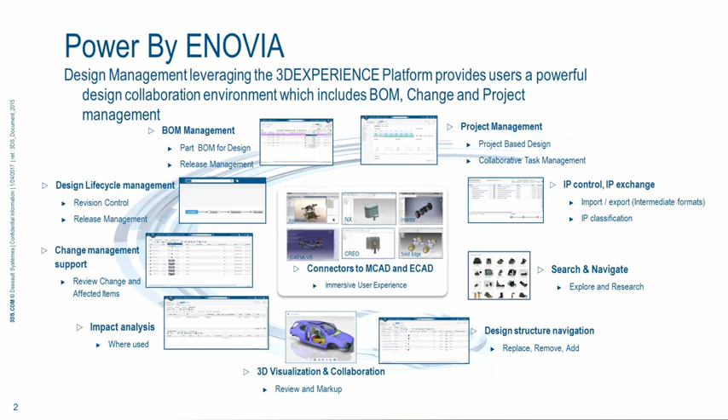So the capabilities we offer with Power By ENOVIA today really look towards the governance applications. We'd also like to include, in the very near future, being able to extend the XCAD data out to applications such as 3DEXPERIENCE, SIMULIA, and DELMIA.

Doing this is something we've always wanted to accomplish. It would provide us with capabilities such as being able to leverage true digital mock-up.

It would also help support multi-CAD structures. So if I have a company using more than one design tool to design their product, they'd be able to see the entire product in its context with multiple design tools, and support the capabilities within the various applications we have out there in 3DEXPERIENCE, Catia, DELMIA, and SIMULIA.

So things like process planning, analytics, and more electrical design, let's say, as a module within Catia—these are all things we could take advantage of if we could get the XCAD data in.

To do that, there are some things we need to do that are different from what we've been doing today. As some of you may know, we have two different underlying models: one being the traditional classic Designer Central model, and one being the model that 3DEXPERIENCE engineering applications sit on.

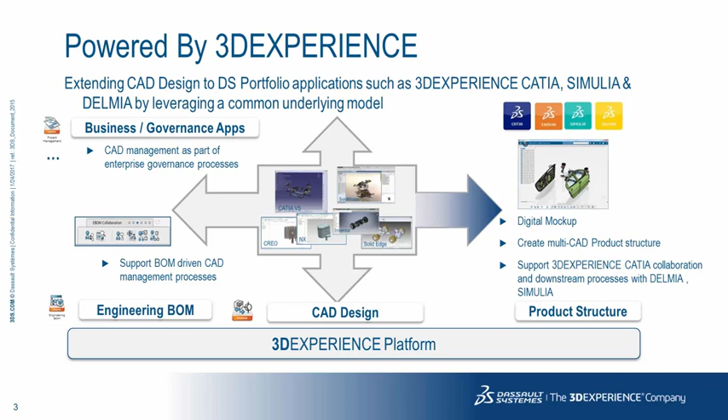What we really want to do is combine those. Now is the perfect opportunity to be able to do that.

If we take a look at the existing ENOVIA XCAD design management solution, we know that it's applet-based. We know it's been around a while and needs a facelift. The applets themselves are no longer supported by new or current browsers.

So that was an opportunity for us to take a look at this design application and ask where we could evolve it to—knowing that our targets need to be not only on-premise, which we support today, but cloud and mobility as we move into the future.

So looking at where we needed to go, we decided we wanted to take advantage of new capability sets, including new user experiences, such as using the 3D dashboarding and widget technology—building up an app out of widgets that helps the designer on the website work with their information without ever opening up their design tool, or collaborate much more easily than before.

So widgets such as folder editors, product structure editors, 3D play, or compare capabilities could all be within a single application that helps the user go through a design session using the web.

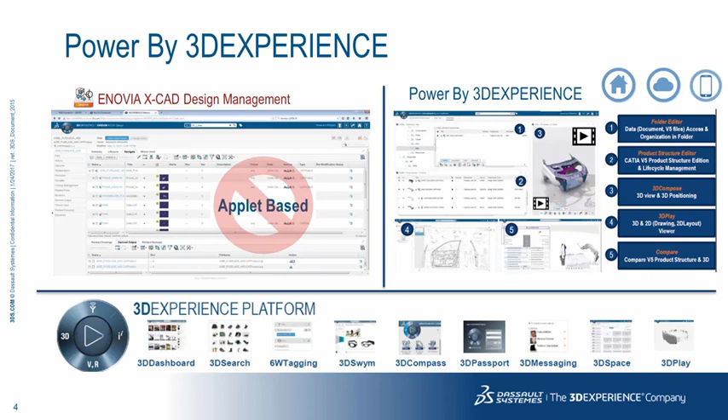So this is where we want to go—having XCAD built on top of the same underlying model as Catia 3DEXPERIENCE and the other DS-rich portfolio applications such as Delmia and SIMULIA.

The values that come along with actually moving onto a common architecture are the following. Being able to do a configured multi-CAD digital mock-up, so increase the design capabilities.

If we can move NX and Creo, for example, into the 3DEXPERIENCE world, we can apply a good deal of capabilities to those designs. Actually have configured design, leveraging the 3DEXPERIENCE Catia, web and mobile access for session building and authoring.

So not just being able to navigate a particular structure, but actually being able to do some DMU, being able to add in components, build a structure, and be able to open up that structure into the design tool.

Integrated change and BOM management, so compliancy with enterprise processes. As I had mentioned previously, we want to continue to extend the XCAD data into the governance applications.

But also start to take some of the governance applications capabilities, such as change actions, and build those right into the design tools themselves. So if the user has a change action they need to take care of, they simply could drag and drop their change action right into the design session and open up that particular design and start to work with it. So having more integral PLM type capabilities right within the design tool itself.

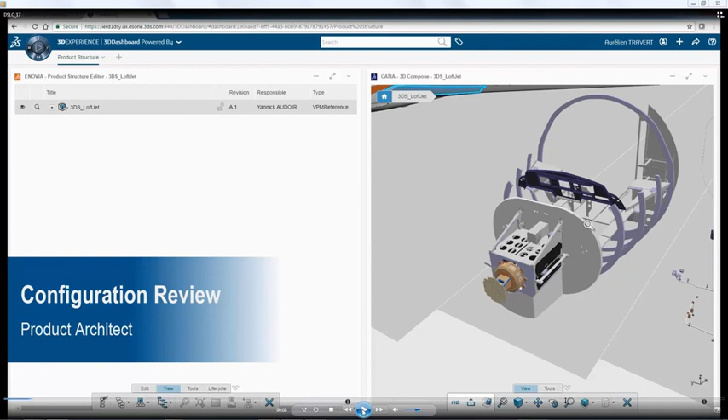So the first thing under a product architect is a configuration review. There's a few different configurations that they may be able to look at. So here they have available product configurations.

Again, we could apply this to the XCAD. They have unit 1, 2, and 3. So the product architect can go ahead and select which product configuration they want and start to be able to look at that and analyze what they want to do.

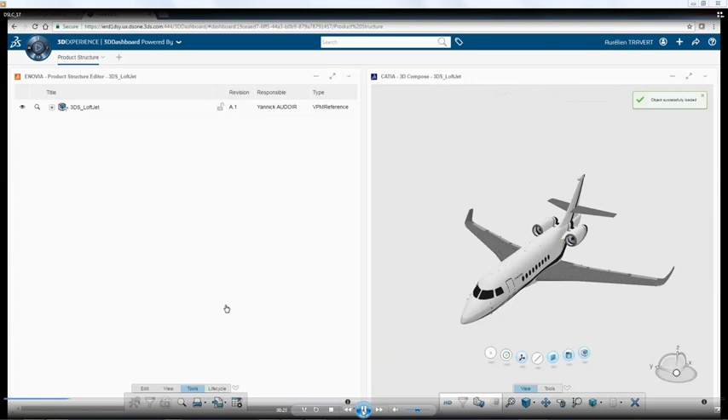In this case, the story is we need to make a change to the radar system. So here we take a close look at what the radar system actually is, where it's located, and then notice the first design tool that we're going to use is the SolidWorks tool.

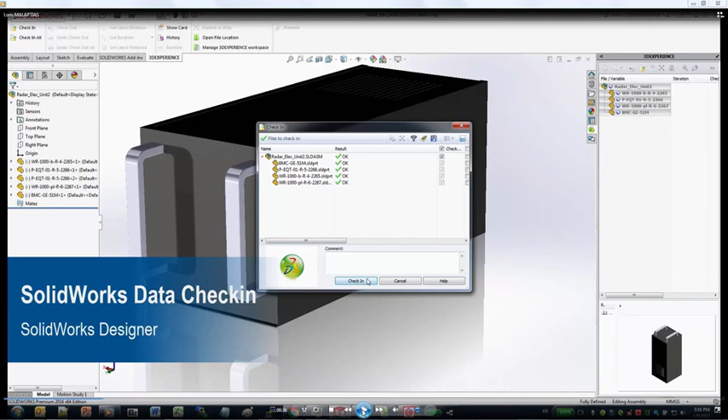This is the electronics box that runs the radar system. So here the SolidWorks data is being checked in from SolidWorks.

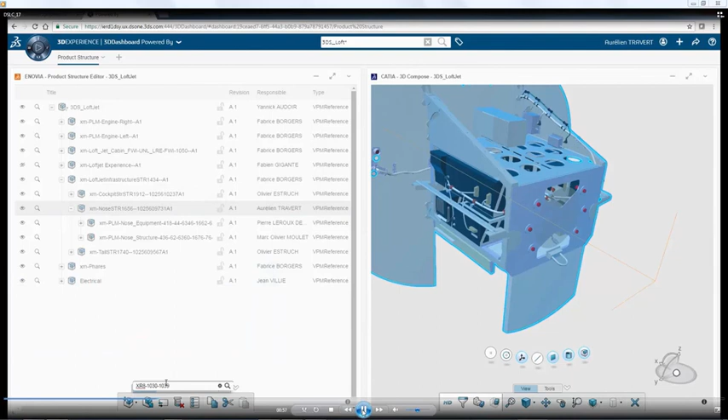So as that occurs, we have the opportunity to do the same thing with Catia for the actual mechanical radar unit itself, and then be able to, within the product architecture, insert those components into this assembly to get an idea of what they would look like.

Again, we're here basically doing a digital mock-up type of scenario. So we go out and we search for each of the respective components, and it doesn't matter where they came from, we're supporting them under the same common architecture. So here we can see that 3 different tools, Catia V5, SolidWorks, and 3DEXPERIENCE Catia, are being used in this scenario.

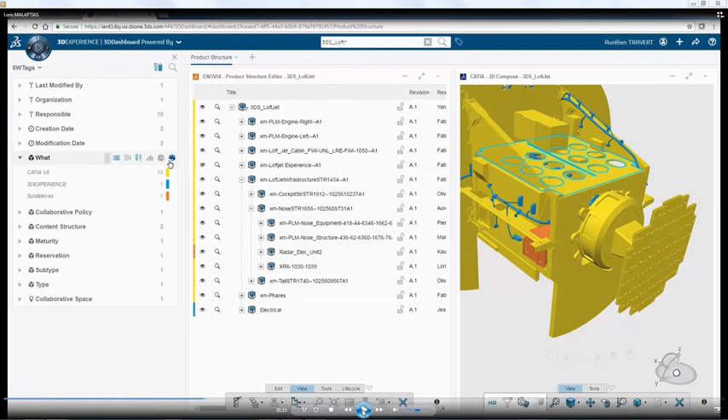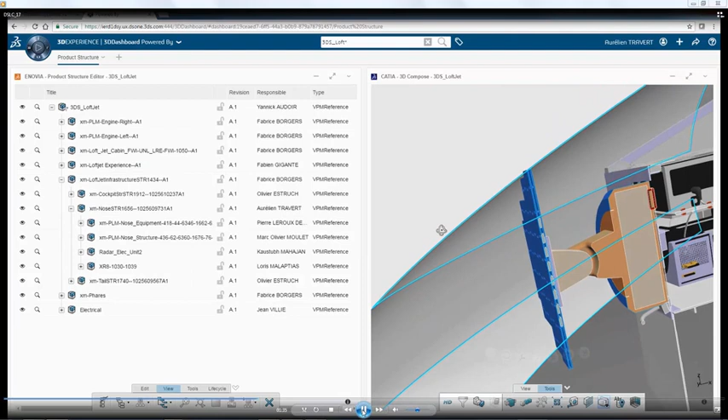So now we'll go ahead and do a bit more of the digital mock-up here and start to pull in other associated information, like the nose cone on this jet. We can see that we instantly have an issue here where the radar screen is actually hitting the nose cone itself. So that's kind of a problem. We don't want to have that happening.

So here, right in context of that design, we can open up a change action and pull in that change action with the proposed changes, put it into in-work, and then drag that into our structure here and look at that.

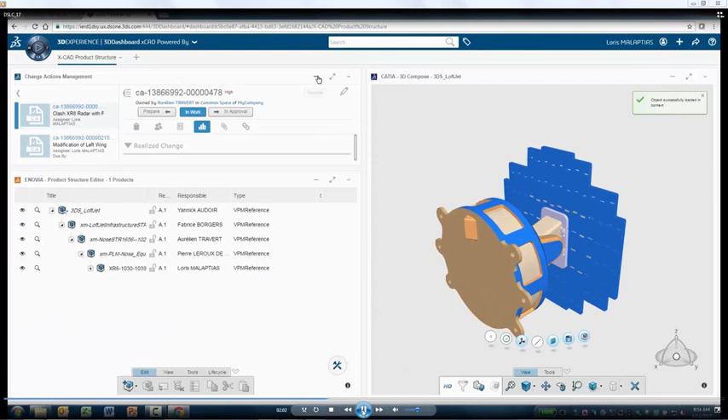So it's like, okay, we know what component, as we look through this, that we want to change. We can do a spatial query to see what's around it, understand that that is hitting the nose cone, and we wanted to be able to bring that information in, and then launch right from within the structure application into Catia V5.

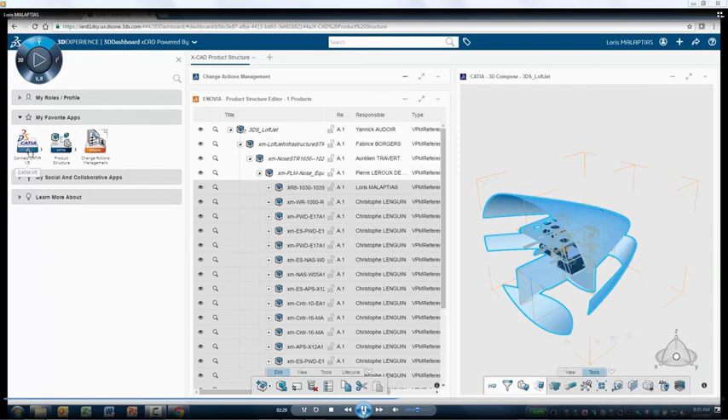So that'll bring this particular assembly in, and then the designers can go off and make the necessary changes so that as the radar unit articulates, it doesn't hit the nose cone anymore. So it's a matter of positioning, and then creating new revisions on the way in.

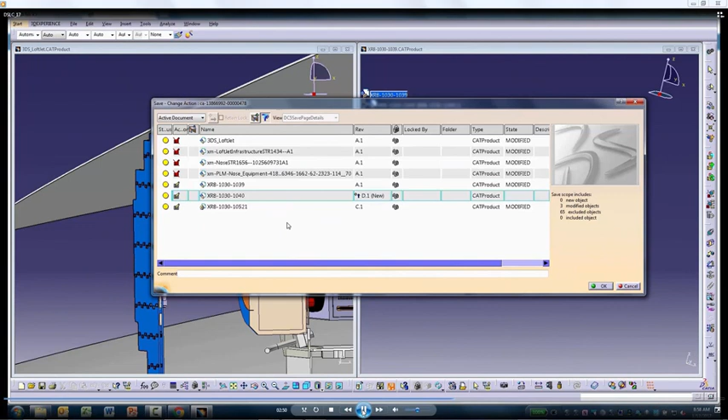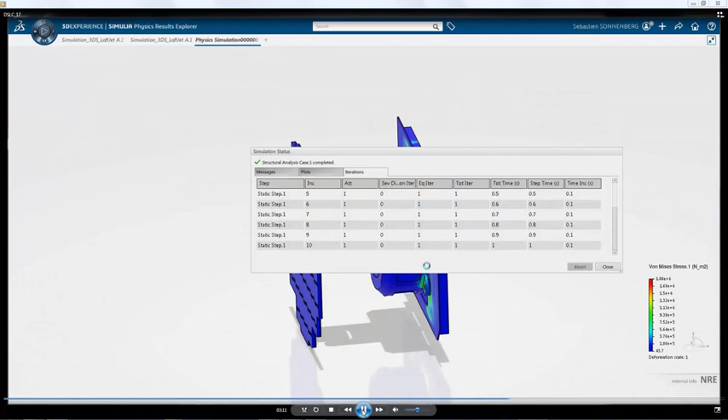Notice that when we do create the new revisions and we go back and look into the change action, it automatically gets updated as to the realized changes that have occurred. So now again, extending the same information, no matter where it came from, what design tool, into other applications such as SIMULIA to be able to do stress analysis or heat analysis, whatever the case may be. We have that capability to do that.

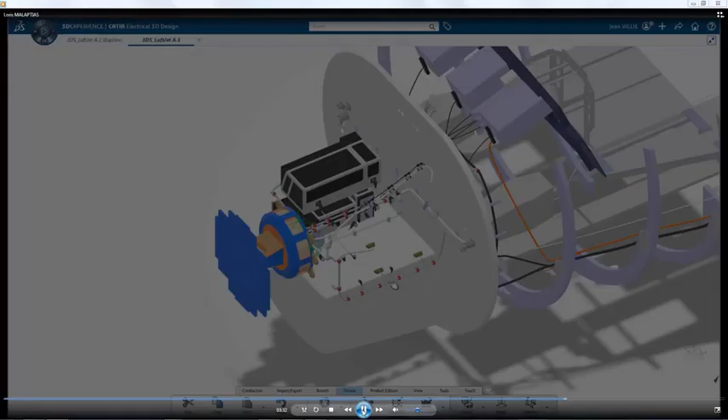So all this design information is interoperable with the other engineering applications. Using other capabilities within Catia 3DEXPERIENCE, for example, as I said, maybe the electrical component, we can do a design in context where we've got 3 different design sources here, but yet we're able to build more design content around all this information.

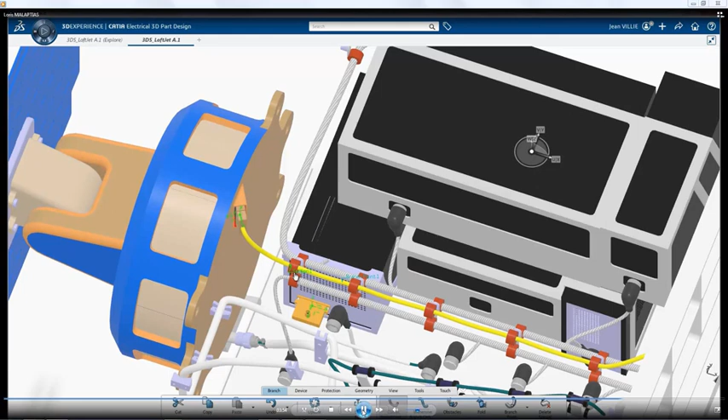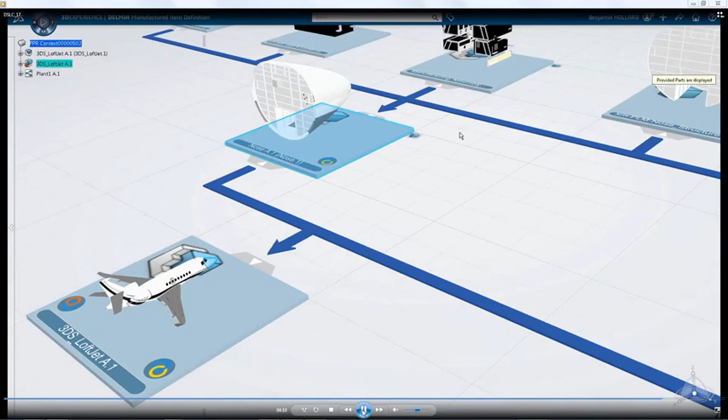And then finally, in Delmia, we have the opportunity to take this information, again, no matter where it came from or what it's made up of, and start to do our layout for manufacturing or assembly processes. So here we can see that the assembly processes are put into place, and now our radar unit isn't sticking out of our nose cone anymore.

So that's all good. But the idea is, no matter what you're actually designing, whether it's something simple or something more complex, the same types of scenarios are going to be there. You're going to do interference checking. You're going to want to be able to do structure addition. You're going to want to be able to see it in the web before you actually ever go out and make the changes within a design tool, so that you understand the full impact of what's happening with the design itself.

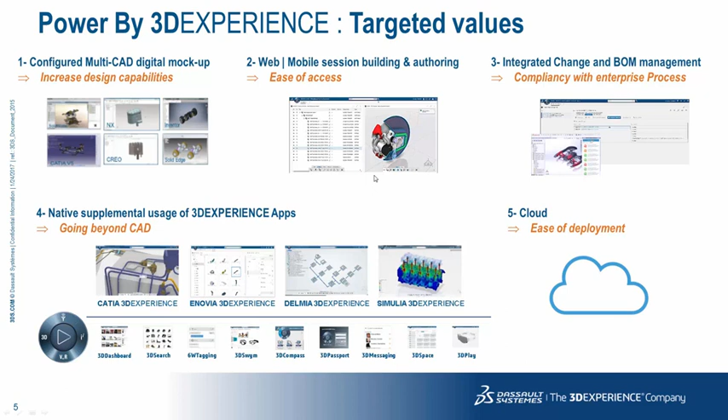Now, the next thing is, what roles are we going to provide through PoweredBy? So there's a targeted role already today, it's called PAR. It's actually controlled availability only. We really created the Product Architecture Designer in the context of Toyota and Honda motorcycle.

So we've been working with this type of application for a while, but we've done it actually on Designer Central, or the older data model. So when we look at the values and what we have available as far as roles go for those, we're somewhat limited in today's 2017 release. Really where we want to go is the 3D Product Engineer, where we'll have all the capabilities, and that'll be GA at 18X, and we transition into a new role called PAU.

So we'll have the configured multi-CAD, the web mobile session, the integrated change, native supplemental usage in cloud. So the targeted roles for the various applications, or the values that we have here, are really targeted at PAU. PAR we would only want to use for demonstration only, which we'll discuss a little bit. If we look at the roadmap, we started out with PoweredBy ENOVIA, and that's our first step there that we've had for quite a while.

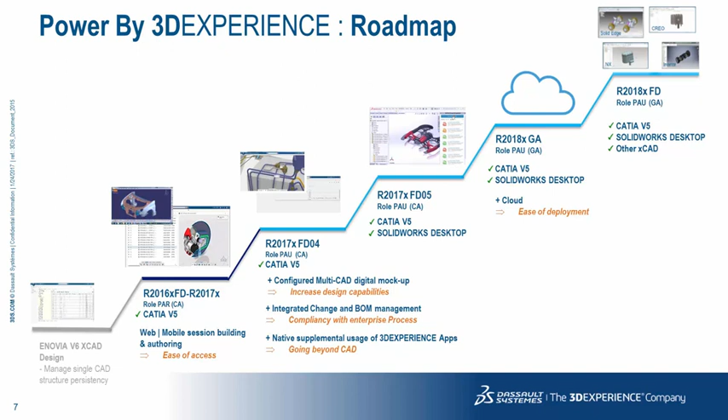And then the final step in this roadmap is to integrate the other XCAD into the common model. So we'll have Solid Edge, Creo, NX, and Inventor able to work with the same data sets as Catia V5 and SolidWorks. So that's at an FD yet to be determined. That's the direction we're going in, and that's the roadmap that we're going to choose to get there.

Now, the path to 3DEXPERIENCE for Catia V5. Catia V5 is going to be our obvious target to start with because of our direction and really what we're doing here. So initially, the 17X Catia 2017X GA, really what we'd like to do is to be able to bring the Catia V5 customer directly into 3DEXPERIENCE Catia.

And there's a thing to be aware of here, of course, and we see that all along the bottom. This is the ultimate situation. As a customer is just on Catia V5 and they say, yeah, let's go ahead and go right to 3DEXPERIENCE Catia. This requires a transformation in business process and thinking, because it's a different world, right?

So we're going from Catia that might be based on a Designer Central type of an architecture, and then bringing them right into a Catia or 3DEXPERIENCE Catia world.

The next one for Catia would be going to PAU for our 2017X FD04, and again that's controlled availability, where we really take the Catia user and they start to work with 3DEXPERIENCE Catia just through being on the same model. So they can use the Catia V5 right in the context of 3DEXPERIENCE Catia.

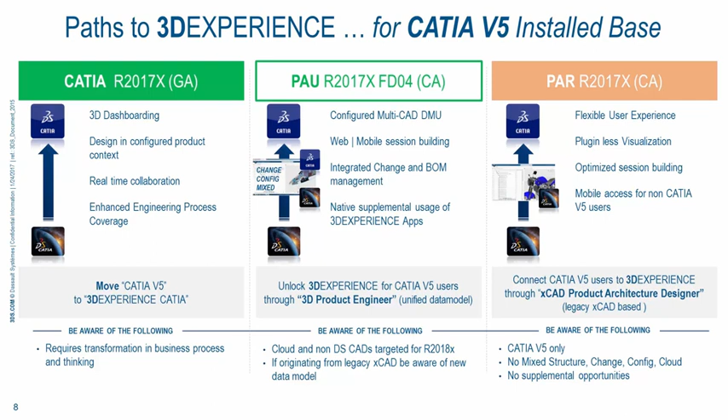So if we take a look at the paths in a different view, first priority, as I had mentioned, is so we can get people from Catia V5 right into 3DEXPERIENCE Catia. That's great. A second option is to take them to PAU. So, hopefully not stopping at PAR.

Again, it's like PAU will be available for Catia V5 at 17x FD04. So we want to be able to bring the V5 users, the Catia V5 users into that path. And then again, the least desirable, as we said, is PAR actually stops at 17x, and really we want them to go to the full user experience, either through PAU or directly to the full user experience.

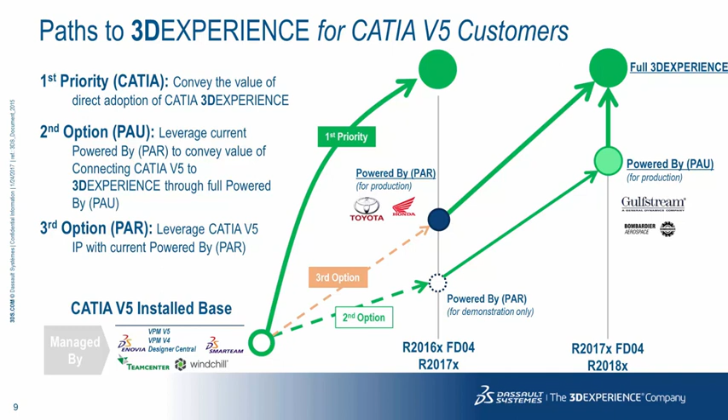So that's really it for PoweredBy. A lot of big changes going on.